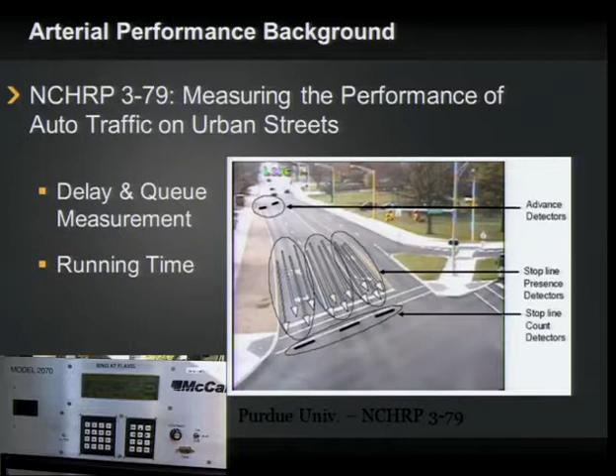Here locally in Portland, it started with a desire to plan for system management and operation. And so what's called TSMO, Transportation System Management and Operations, came together as a region. The DOT, the state, the cities, the county, TriMet, all these entities came together and said, how do we effectively plan for transportation within corridors? And one of the things that was a struggle to get our arms around was, well, what do we mean by arterial performance measures? There's so many different modes, so many different technologies out there, and they're changing really rapidly. And so the TSMO plan laid the groundwork for an upcoming project. The one that I'm going to focus on is the arterial performance management concept of operations.

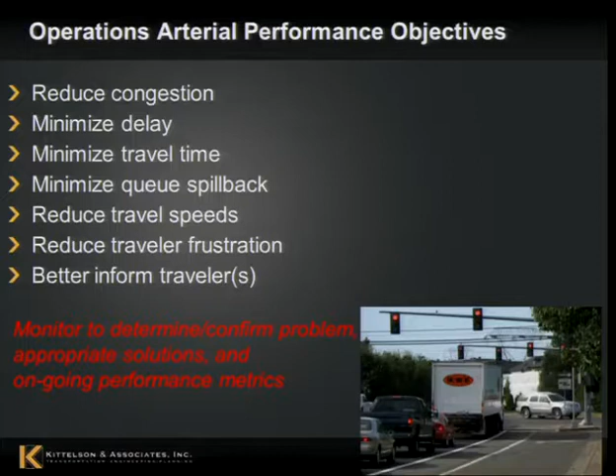So I just threw this up there as a few examples. You can brainstorm 100 different potential outcomes on arterials because you have every different mode and you have all sorts of different objectives. So it could be safety driven, it could be bicycle throughput, it could be transit person throughput as different objectives. But at some level with your stakeholders, you have to get to the point where folks are agreeing that this is what we value in our projects, what we want our projects to accomplish, and then use that to set up your performance measurement system to make sure you're accomplishing that.

And we're going to have planners, engineers, modelers, researchers, and the traveling public that may all be potential end users of the data. They're going to have different levels of technical expertise, and they're going to have different needs and desires for what the data looks like and how they'll use it. And that's not a bad thing. I think we can learn a lot from each other as planners, engineers, researchers, to be able to understand what the data is used for.

But for example, researchers want the data at its base lowest level so that they can understand and do research on very specific questions, whereas planners may just be wanting to communicate to decision makers, hey, what's the change in travel time on this corridor as we put in a new signal system? And then the traveling public, they just want to know, how long will it take me to get from point A to point B? Pretty straightforward.

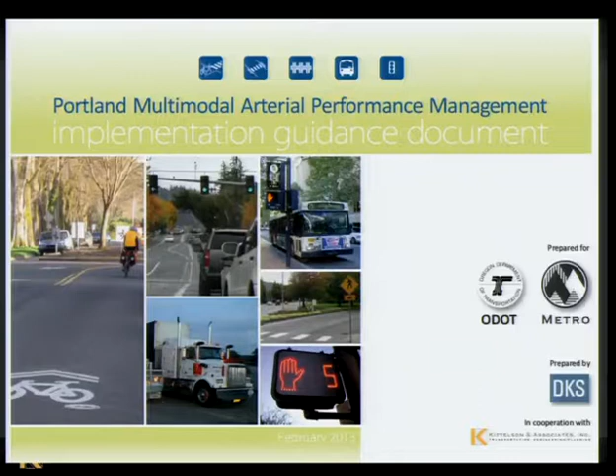So I'm going to jump in and talk a little bit about what we did here, specifically in Portland. So we were on a consulting team as a subconsultant to DKS, and we worked with ODOT, Metro, and all of the local cities and counties here in the Portland region to brainstorm, what do we mean by arterial performance measures? What is this going to look like for us? And what we've put together is sort of a guidance document to help folks, because this is relatively new within the industry, for what we mean by some of these different technologies and how they get applied.

And the distinguishment is some of that detection is flowing through the controller. Some of it is going into a different server. But ultimately, what we want is that information to end up in a common place.

In Portland, we've established Portal as that common place where we want to be able to feed the data into Portal and have folks be able to run their visualizations, reports, analyses. And that also takes care of the process of archiving and sharing the data. Portland State is going to take the effort of having the servers and the space to be able to store all this data that's coming off of the different detectors and devices that will be put out in Portland.

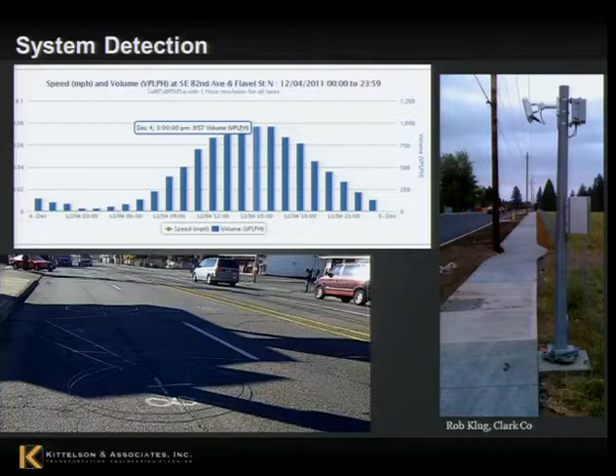So again, length-based classification is simply measuring the length and making some inference that longer vehicles are in fact trucks and classifying them that way. And that's actually the way that the Federal Highway Administration runs things. Length-based classification serves two different purposes. Obviously, we want to know the amount of trucks that are passing over our roadways to keep track of it, to understand trends, understand the changes if a new distribution center opens along the arterial.

But also, the length-based classification allows us to be able to do some things related to speed and length and conditionally let the controller make some decisions about truck signal priority. So we could potentially use our detection system to do more than one thing. And truck signal priority, does everybody know what signal priority is? Basically holding the green for the bus to get through. In this case, it'd be holding the green to get the truck through.

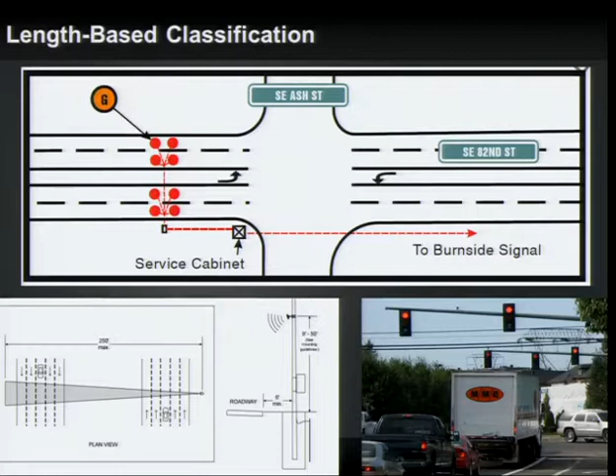And again, there's lots of benefits that have been shown with truck signal priority to be able to help trucks get through. There isn't a worse place for a truck than right here at the front of the queue from an operations point of view, because they just have much longer acceleration profiles. And if that's the first one and they had to do a hard brake, that's a big impact to the pavement. And so that, again, is a resource that we have that we want to manage effectively.

And all of this had been collected manually on the trails previously. What we wanted to do was be able to do this in an automated fashion. But one of the lessons learned with this is that bicyclists don't always ride in a single file line. In fact, they ride side by side quite often. We did some tests to make sure we weren't missing any bikes, and we weren't in the limited amount of sampling that we did.

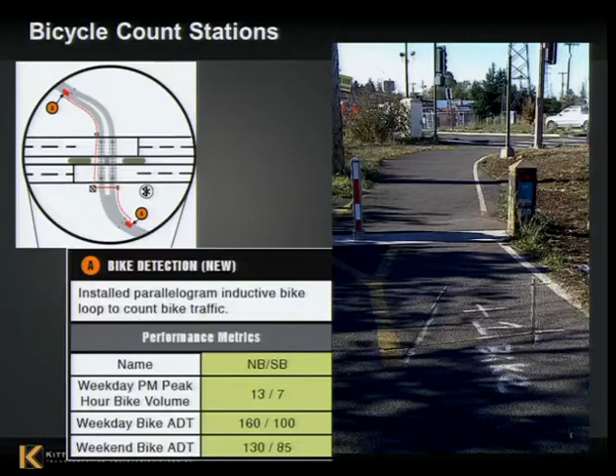TriMet has a wealth of data, so a big part of this was communicating to stakeholders that this data is out there, it's available, and it's useful. So they wanted to see bus on-time performance. We were able to pull out of the controller the number of transit signal priority calls that were happening in each direction, and in some cases not happening at all.

And then we wanted to be able to map ons and offs, because one of the things that we were struggling with as a team is, what's the pedestrian activity out here on this corridor, 82nd Avenue? There's no perfect technology to make sure that we're getting every pedestrian. And so let's think about this. And there was a great idea from a gentleman at TriMet.

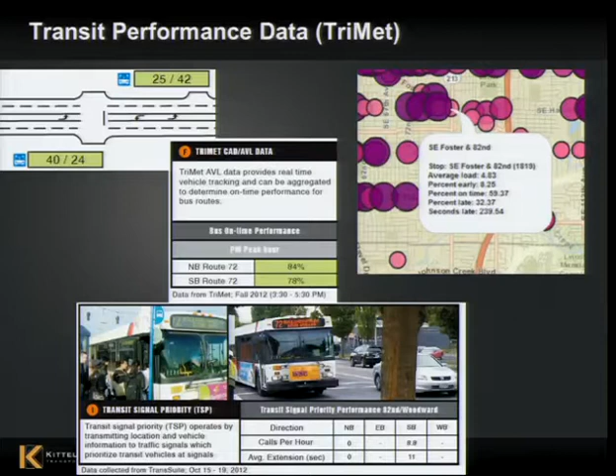A lot of locations out here like 82nd Avenue, most of the pedestrians are tied to a transit trip. So if we know the ons and offs within and around the bus stop, we can start to, at least at some level, approximate the level of transit activity or pedestrian activity happening in the corridor. And we can fuse that with the number of times that the ped service is happening at the intersection.

Bluetooth data, so this is a picture of what the permanent Bluetooth readers look like. They've got a pair of antennas to enhance that range to make sure that we're not missing anybody that's going by, and you can see a blue dot to show where each of those permanent devices are. One of the questions that was brought up, particularly early in Bluetooth technology, is will we see a steady drop-off as more and more Bluetooth devices become encrypted, or you just can't get access to them? Will there be another standard that starts to take hold?

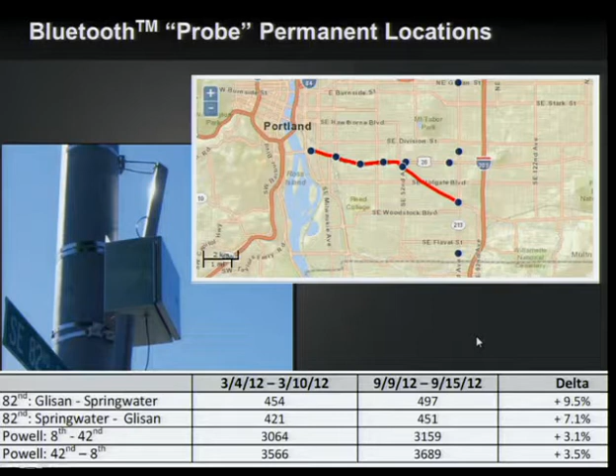And what we've seen over time is that Bluetooth is becoming more and more the de facto protocol for wireless communications, and that more and more vehicles are coming with Bluetooth, or more than one Bluetooth device within them. So what we're seeing is capture rates actually going up. So we're getting a richer data sample off of Bluetooth as we move forward relative to how it was a few years ago. And so that's what this is showing, a comparison over a 6-month period of the change in Bluetooth devices at a couple different stations in the corridor.

Again, with the aim that we want to get the best data possible, we may have to fuse this with other data sources, so we want to understand how accurate each of the different data sources is. And then the nice thing about Portal or any automated data source is these all look like simple text files until you start plotting them and turning them into meaningful information.

And the ability to show what was the trip distance, what are the total trips, what's the average travel time, what's the standard deviation, what's the profile look like over time, in this case for travel time, between Powell and 8th and Powell and 42nd. So again, this is showing all the Bluetooth devices that are going through there.

Who knows if this was somebody that was waiting at a bus stop and then eventually got on the bus and passed both of the readers. So there's little nuances like that in the data set that with an automated data source, you can't always tell the difference. So being aware of the accuracy of the data and the fidelity of the data is important.

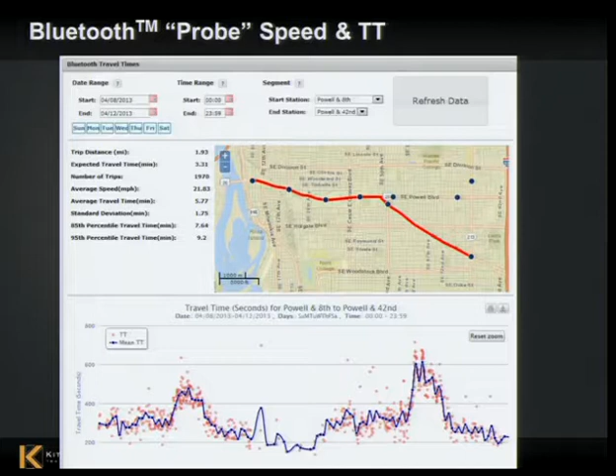And then I would argue having this information on a continuous basis is so important. Previously, to evaluate something as simple as changing the signal timing on this corridor, we would oftentimes change it, observe it, and drive or pay somebody to drive their car up and down the corridor to see if we met the objective of helping more cars get through with less stops. The problem with that is it's a very limited sample size, and depending on who's doing the before and after travel time runs in their car, they may have a bias objective.

It may be, gosh, well, the consultant that I'm working for just did the retiming, and I really want the retiming to work, so go ahead and drive a little faster. If it turns yellow, just make sure you make it through. That's not necessarily what we want to be doing with our automated performance measures. That's why we want automated. And that's why we want to be able to have this over time, because even if you have a very limited sample size, if you can collect it every day, all hours of days, it starts to make up for some of those biases in the data set.

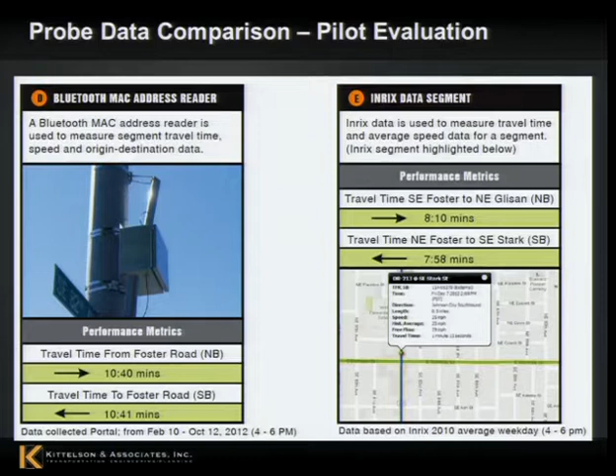Now, granted, this is not apples to apples because the Bluetooth was based on very current 2012 data, and the INRIX data was based on 2010, I believe. But you can see that something is definitely off here because Bluetooth was showing 10 minutes and 40 seconds traveling northbound, and INRIX is showing 8 minutes and 10 seconds. That 2.5 minutes is substantial in its difference. And so I think it just begs the question of further research as to why these different data sources are producing different results. Which one's accurate, which one needs improvement.

And then this is near and dear to my heart. This is the stuff that I get to spend the most time with. It's controllers, controller logs, and how well is our signal timing working. And so this just shows you an example. During one 60-minute time period, the number of times that each movement is served, that's the phase service. The number of times that pedestrians are served, that's not the times that they push the button, that's the times that the walk comes up.

And then the average green time, the number of times that that movement maxes out or forces off. That basically means that there's still detection. It's still serving that movement at the end of the green. And basically it says, well, I can't give you any more. I've run out of the time that the engineers put in there for me to be able to serve you, which may or may not be a good thing. There may be good reasons to do that.

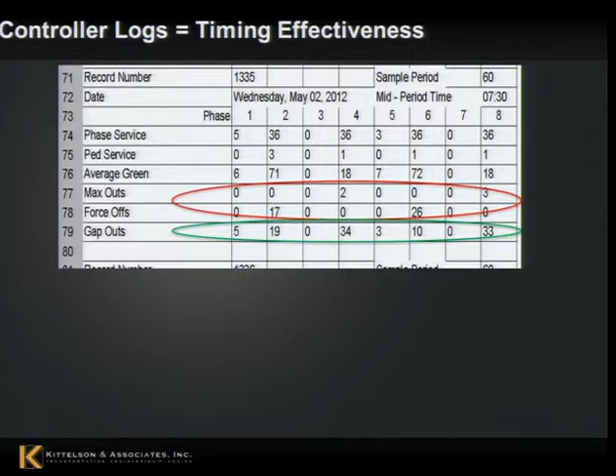Gap outs are situations where there was additional maximum green time that was programmed in there by the engineer, but the detection is showing that we don't need all of that green time. So again, it's helping us in an automated fashion understand which movements may not be getting enough green time to go out there and tweak the signal timing and make sure that it works to meet an objective, if that objective is to make sure folks don't have to wait through more than one cycle to be served, which is oftentimes called a split failure.

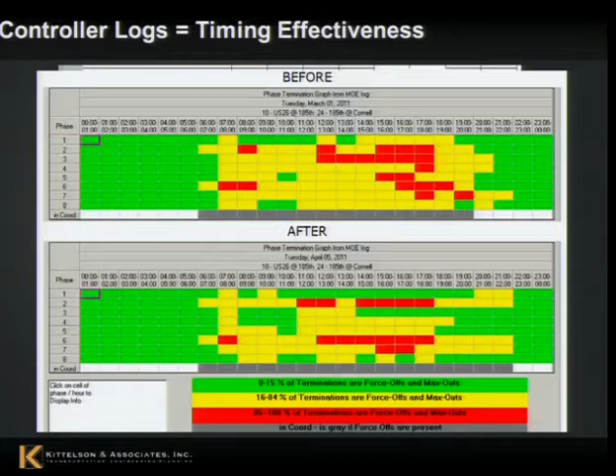And then getting to the ability to visualize this, this is using the 2070 Voyage software that's used throughout the state here, just showing the phases across here. And red is those situations where you have a lot more of the max outs or force offs happening where you're running out of green time for those movements. And what we want to do is see less yellow and red in after than we see before. And again, keeping this stuff simple is important for decision makers, bosses, and folks that you'll be working with once you graduate.

Things like service delay log is something that's starting to become more and more prevalent. This was championed by Peter Koonce here at the City of Portland, who wanted to understand for signal timing purposes, if I make my cycle length longer to try to move more cars, how much additional delay am I asking my pedestrians to wait around for? And is that having negative trade-offs with jaywalking or other things?

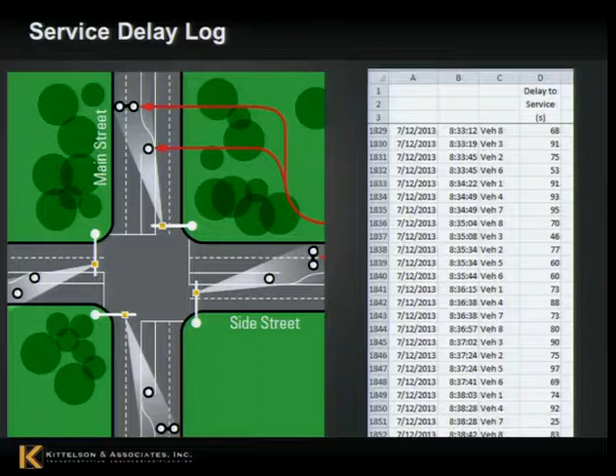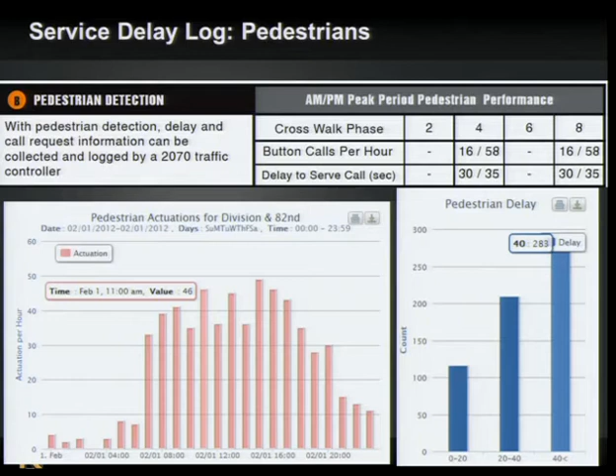So we've been working with him and a whole bunch of other folks within the region to develop a way to measure delay by input. That could be a vehicle detector, it could be a pedestrian detector, it could be a bike loop. How long are each of these users having to wait before they get their green or go movement? And then you can start to relate that delay to level of service. So using the Highway Capacity Manual at intersections, the average delay is average level of service. And like I said, pedestrians then can be mapped and plotted.

Quality of coordination is important as well. This shows an example of using upstream detectors and simply keeping track of how many times a vehicle goes over it when the signal is green versus red. Ideally, in a coordinated system, we're having a lot more vehicles show up when it's green than when it's red. That's going to result in less stops, better emissions, and so we want to be able to measure this. Here in the state, we have the ability to lump that into how many arrived on green and how many arrived on red. And that can be plotted and show the net difference between arrivals on red and green before and after signal retiming.

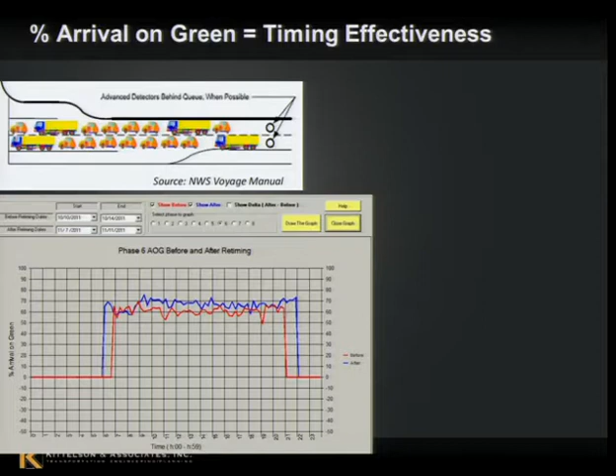But what they're doing in Utah that's really interesting is they're using a stronger processor and smarter software within the controller to plot this for every single actuation over that detector. Why that's important is we can see by cluster analysis. This is the start of red here, and it loops back around, so this is all red time. That green line is when the green indication for that movement comes up, and the yellow line is when the yellow starts. And so you can start to see when vehicles are arriving.

And this is really important both from signal timing effectiveness for moving cars through, but also thinking through safety. We don't want a lot of folks showing up in the yellow or shortly after the red. What we want is the majority of folks showing up during green. And so that has to do with how we set up our signal timing to make sure that works.

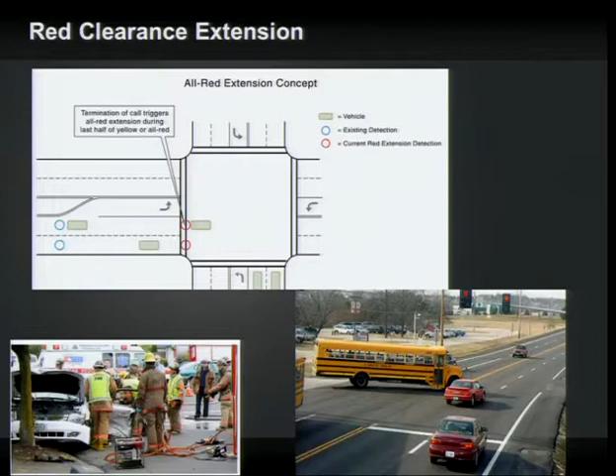The last specific piece that I'll point to, again related to safety, is this idea of a red clearance extension. Within Voyage, we have the ability to hold the red if somebody's detected in the intersection during the red. This allows us to potentially prevent near misses or crashes. It's just another feature to be aware of, and we're setting up logs right now to be able to measure that.

So in summary, what are we collecting on our arterials here in Portland? Transit, and all of this data is coming from TriMet: on-time performance, ons and offs, travel time, and the number of TSP requests. That last one, TSP request, actually does come from the controller. For pedestrians, we're collecting the number of times the pedestrian phase is served and the pedestrian delay that's occurring, basically the duration between when somebody pushes the button to the time when they get a walk.

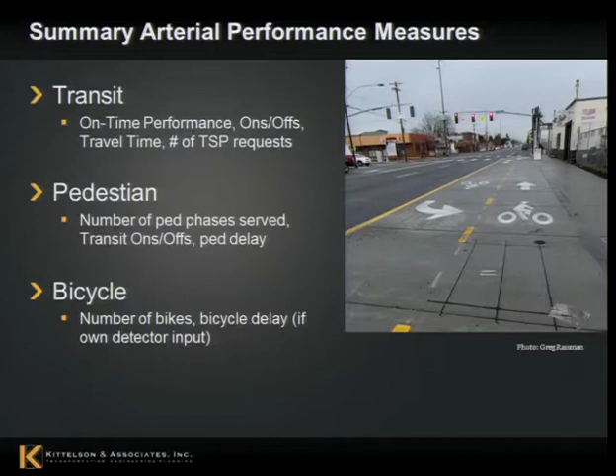For bikes, where we have permanent detection, like shown here in this photo, we're collecting the number of bikes, and with detection in an exclusive bike facility, the time from the actuation to the service can be inferred as the delay for the bicyclist. On the freight side, we're able to quantify the number of trucks using length-based classification, and capture using the controller log how often truck signal priority is being requested.

And for autos, we can get the number of vehicles either using a system detector or the controller log, travel time with Bluetooth, INRIX, a whole bunch of other things. We can get speeds depending on the detection used, delay, quality of coordination, and whether or not we're giving enough green time with max outs versus gap outs.

So what are the next steps? As an outcome of this pilot project, we're working as a consultant team with ODOT and the software vendors to help make these logs easier to use and improve those interfaces. That includes the delay by input so that we can do pedestrian delay in an automated fashion in a very specific manner.

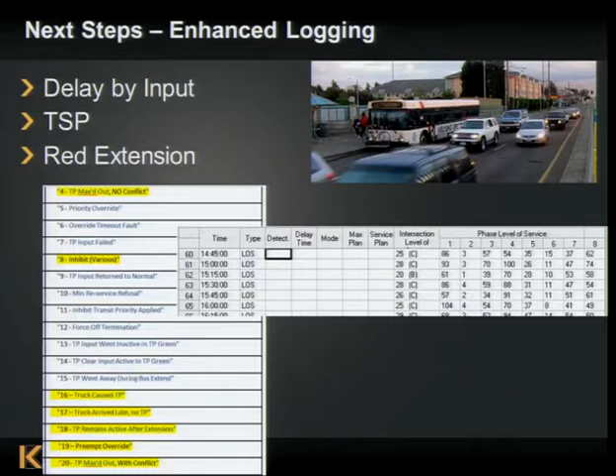TSP, in the sense of being able to log the number of transit signal priorities, and red extension, from the ability to log the number of red extensions. And like I said, that improved interface is something that we're working through right now.

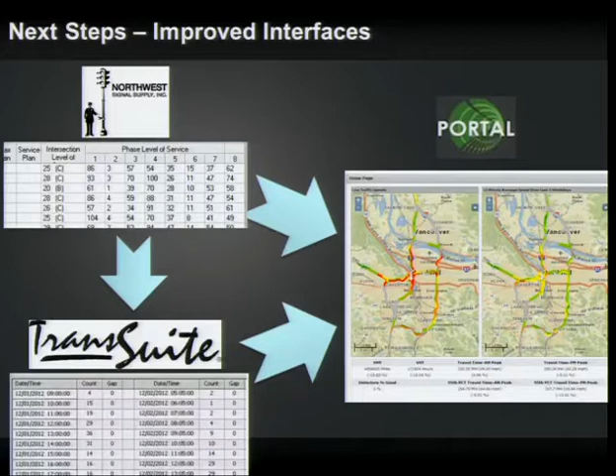It's not easy because you have three different entities that, when something doesn't go right, may not think it's their fault. And so you've got to get the local controller guys to work with the central software guys to work with the archive guys to have a common interface and understand the data so that it can be opened up to access for everybody.

And then you guys fit in as researchers as well. There's a need to validate that the data being pulled off of these automated sources is good and valid, and that it's usable for the different questions being asked of our transportation system.

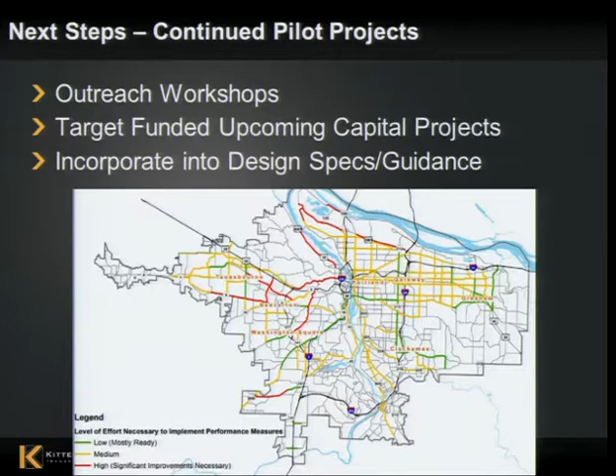And so we're continuing here in the region with future pilot projects. We've done some additional workshops. We're targeting upcoming projects and trying to work with agencies to say, hey, have you thought about adding a system detector here, or a radar unit here, or a Bluetooth reader here, to try to get momentum going around these data sources. Because the more common it is, the more people will ask for it.

So what's the takeaway? To do successful arterial performance, the data's got to be good. If the data's not any good, I think we're wasting our time. Secondly, it's got to be appropriate for what we're trying to answer as far as an outcome. And it needs to be easy to use. Time is a very finite resource, particularly within agencies, and so the easier we present our story with the data, the more likely it's going to be used.

Okay. How long does it go for? How long does it last? Do you always work on it, or do you have a set time after which you have to change something? Most of the time, we're collecting data on an ongoing basis where we have the space to do it. Then we may set up logs only for certain periods when we really want to know, say, the AM and PM peak, if there's limited space in the controller log. But most of the time, we're trying to collect data on an ongoing basis.

Because sometimes people could change information. We didn't really hear the question. Yeah, so the question was, is there variation in how long you want to collect the data? And basically the answer is we want to collect it for as long as possible, but we may not always be able to do it on an ongoing basis.